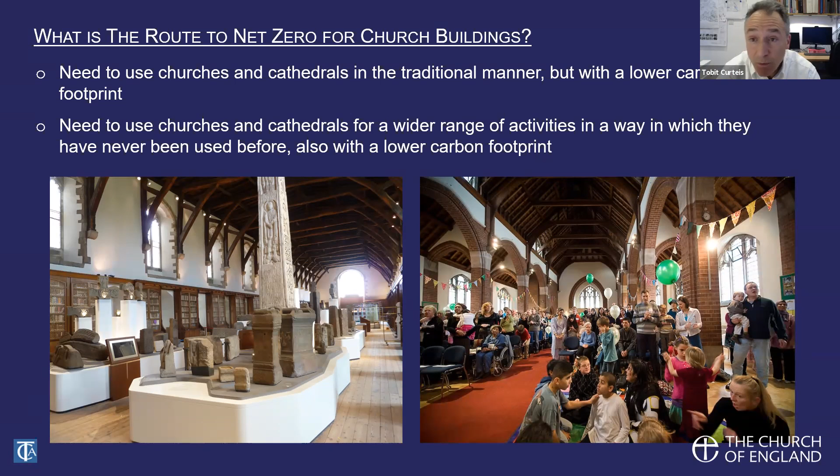Start off with this. We still need to use our churches in their traditional manner. A lot of the churches are still being used exactly as they have been for the last 20 years, but at the same time, a lot are changing their pattern of use. There is a much greater need to use churches and cathedrals for a wide range of activity and community engagement. And the important thing is, this is something that we haven't done in our churches before. We want them to perform differently, and we want them to perform with a lower carbon footprint. So it's quite a challenge.

We are looking to change the usability of the building to make it more usable, whatever that means. It means a whole lot of things, and that's one of the reasons some of these projects don't go terribly smoothly - the lack of definition of what we're actually trying to change. We're trying to make our buildings more sustainable, more comfortable, and more sustainable in conservation terms with a reduced carbon footprint.

In practical terms, I think that generally means 3 things. We want to change the environmental performance of the building. That means make the building more thermally efficient, make it more comfortable to use, make it less susceptible to the sort of deterioration that we have to deal with the whole time, because every project you undertake costs a certain amount of carbon, and so you want to try, when you do an intervention, to make sure it works for the long term.

We want to change our personal conditions. Now, when I was talking to Catherine about this earlier on, we wondered about the terminology here. A lot of the time people feel cold in a building and they say the building's cold. And the question is, is it really cold, or is it the way that you are using the building which is making you feel cold? I think this is worth addressing, and you'll see why in a little bit.

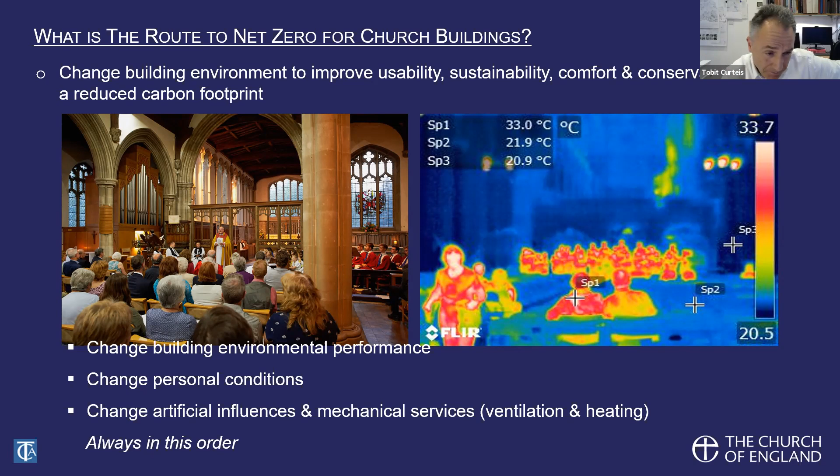Why do we care about this? Why are we worried about this? Why don't we just make our buildings more efficient?

It tends to be the unintended consequences which cause problems. Often I will see very well designed interventions work pretty effectively. They will reduce the amount of energy that's being used. They will improve the usability of the church. They will then cause condensation underneath the lead, which then starts to deteriorate at an alarming rate and needs to be replaced in 20 years. It's those unintended consequences which often, in fact, there's a long history of this in conservation, building conservation generally.

So either you end up with, in projects that don't work, either you end up with poor or inefficient results. It doesn't actually make the building feel better to use. It doesn't actually save you energy. Or you do something which then causes direct damage to the fabric, the collection, the furnishings, whatever it is. Or you're one of the projects that gets it right.

But we're looking today at projects that go wrong and things that go wrong. When we were talking about what to discuss in this, most of these sorts of talks show really good projects. They show the ones that you're proud of, the ones that went right, which is great. But it's actually very instructive to look at the ones that didn't go as well, or where things haven't performed quite as expected, and look at why and learn from them for next time.

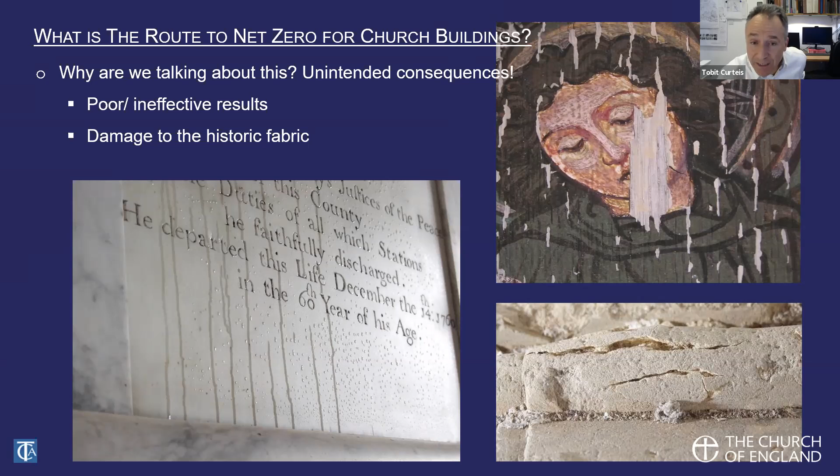So when we have a project and we want to make our church more sustainable on our path to net zero and more usable, what are we actually trying to change? What are the steps in the project that we will try and change?

The biggest, most overriding one is the building envelope. If you are in a church which is in poor condition, almost inevitably, any attempt to make the internal conditions better, more energy efficient, more sustainable, will fail or won't work very well. So even in the simplest net zero steps and sustainability steps, the first thing you need to do is get on top of the building envelope and the rainwater disposal system.

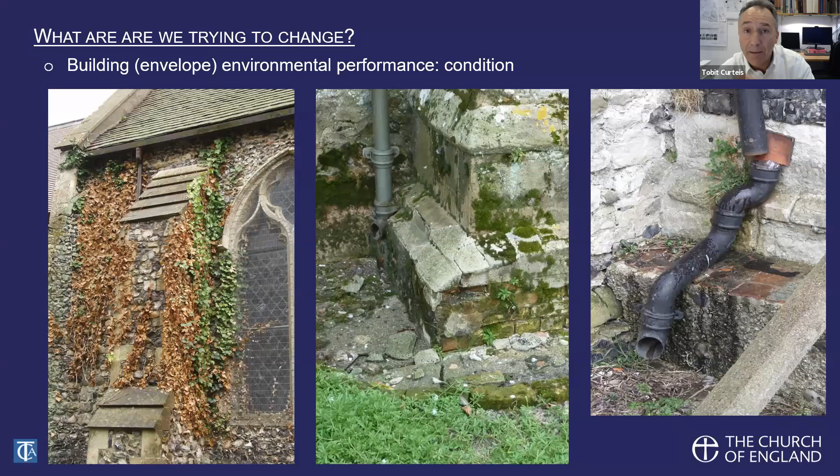Buildings like this work as a system. The envelope is there to keep water on the outside. The rainwater disposal system is there to get that water and take it away from the building. That's how all buildings function. If yours doesn't function like that because of its condition, you will constantly be struggling with what you're doing on the inside.

Next thing we tend to be trying to change is the performance of that envelope. A lot of our buildings were constructed with a particular set of requirements, one of which wasn't keeping us particularly warm. So they function very well for what they were built, but we're asking for different things.

We'll come to this in more detail later on, but it's very easy to look at a church like this with nice thick walls and, in this case, quite big windows, though you often have very small windows, very well insulated until you get to the roof, which is the weakest part in the whole system, and that undermines everything else. So we often want to change the way that building envelope works.

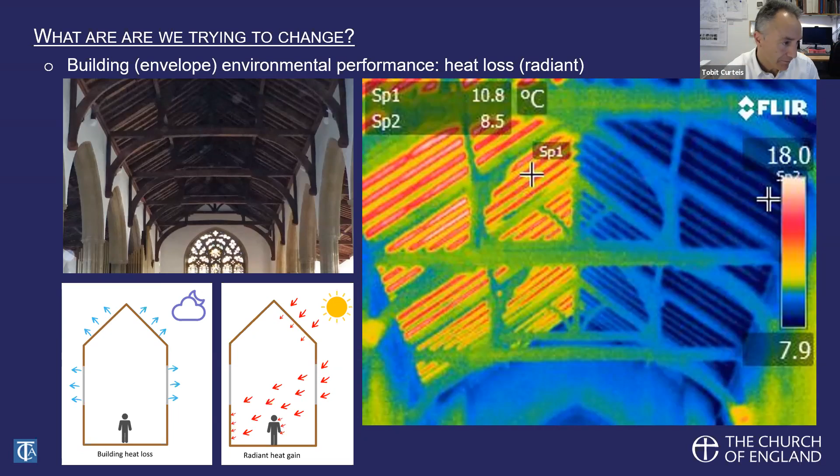It's not only the external envelope that we're concerned about. In many cases, we generate heat in one location of a building, and it disappears into another bit of the building that we don't want it to—in this case, through lath and plaster vaults into a roof space. So it's not necessarily that external part of the skin, it's the internal parts too. The more you can recognize this, the more you can read a building and see where these weaknesses are, the more likely you are to be able to target and control them with your various interventions.

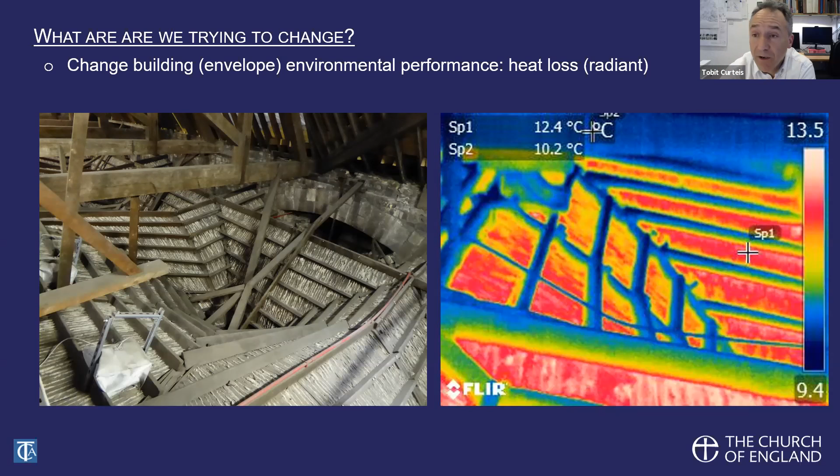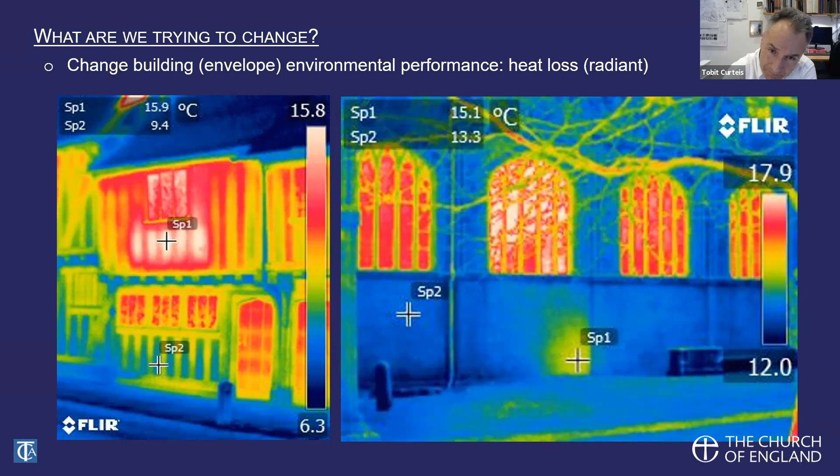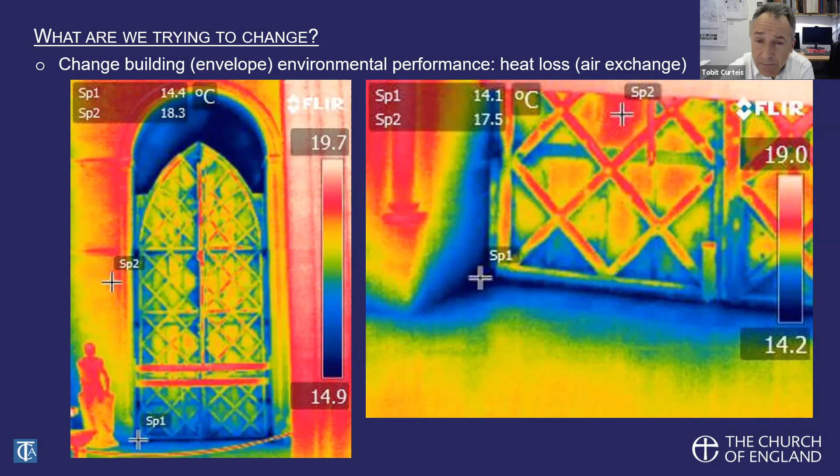And air leakage. Again, buildings weren't constructed to be particularly airtight. And what is sometimes quite useful, when you have high levels of ventilation, undermines things like thermal performance and heating. So we need to recognize where that's going on as well.

When you're looking at a historic building such as a church, it's important to understand what it does in terms of the building environment. Modern, 20th century buildings were constructed with the idea of sealing the external weather outside, then putting big machines inside to create the conditions you wanted to live in. This is not how traditional structures, and certainly not how our church structures, work. They moderate conditions, so highly unstable conditions outside are moderated by the building to produce conditions inside which are comfortable for us to use.

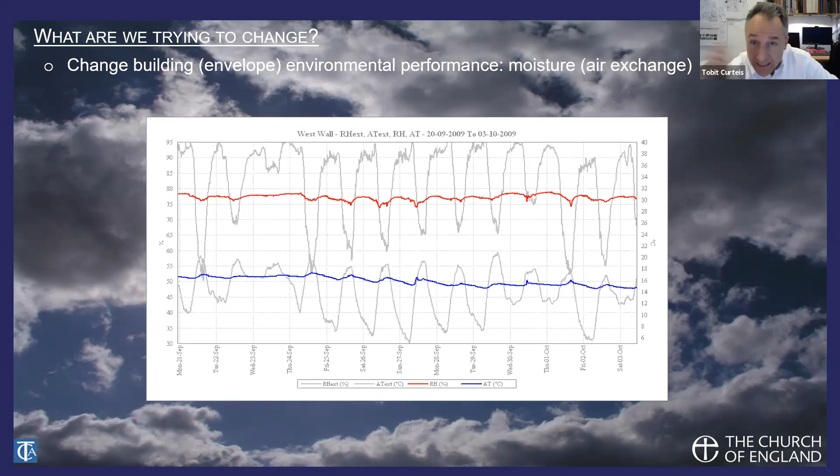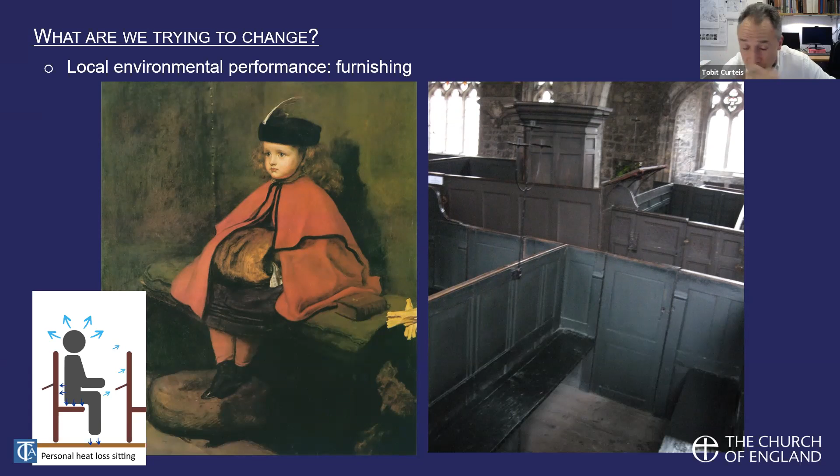That's not where he painted it, but this is a perfect example of how you kept yourself cozy and warm in a church up until the 19th century. Now, of course, we've stripped those out. In the 19th century they stripped them out, but we are constantly doing it even more these days. We're taking away a lot of the pieces of the church which made it comfortable, and we're making it an inherently harder building to be warm in. And we don't tend to recognize that.

We take out our pews to make our space more multifunctional, and suddenly we've taken away - if it's box pews - the place you can make yourself cozy in. Normal pews, we've taken away all the things you can attach radiators to immediately close to you. So those changes in how we use a building have a direct influence on how we can make it a comfortable building to use, and we tend not to be very joined up in our thinking about this.

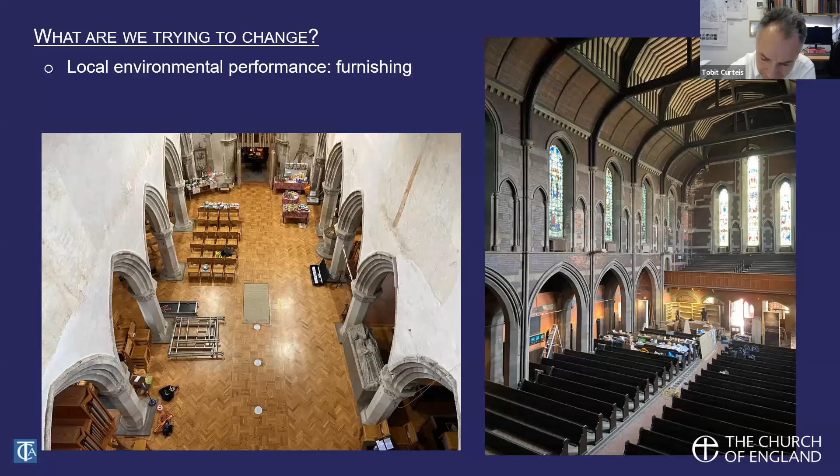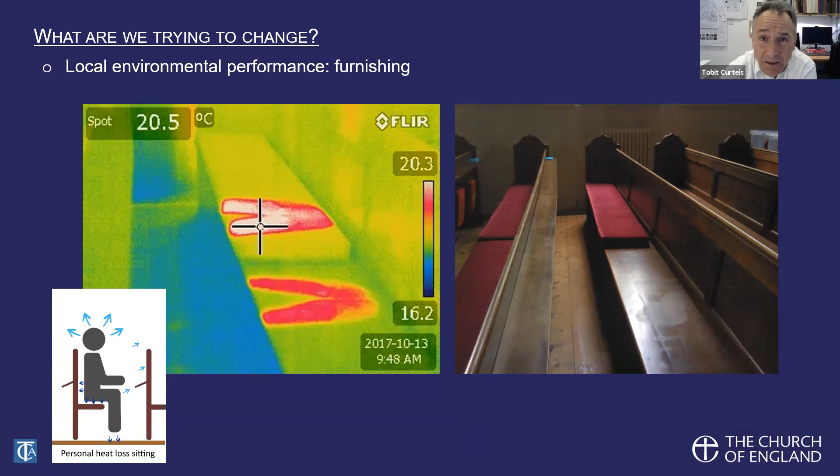We're also very good at not dressing appropriately for some of our churches. Now, I know this is a really difficult one, and architects and people working with church communities to help them use their church, make it more usable, often say, oh, we can't tell people to dress differently. And I think, well, you can't tell people to dress differently, but I think it's an important discussion to have.

Going back to the first and second sermon picture, people used these buildings very differently in the past. This comes down to how you are going to use your church in the future. If it's going to be a space constantly used for community activities, worship, concerts and all those sorts of things, you can sometimes justifiably warm it in a way that you won't suffer from the problem I'm showing you. If it's a church where that's not possible, maybe it can only be used in summer or at certain times of year when it's warm enough. So this sort of heat loss isn't necessarily a problem.

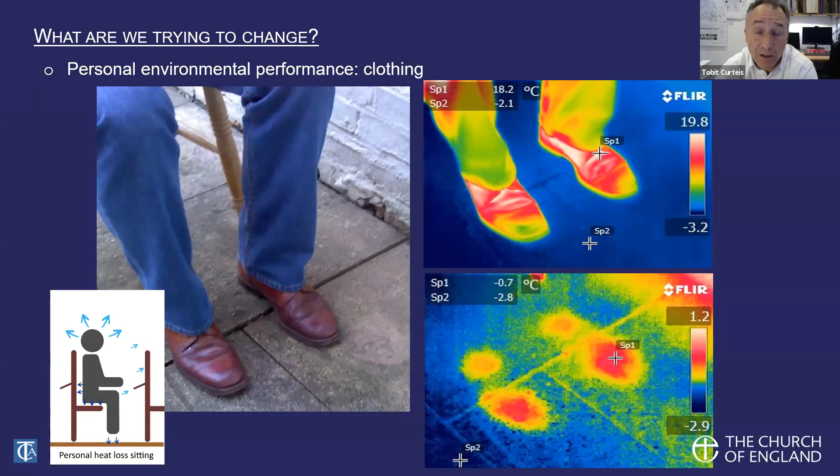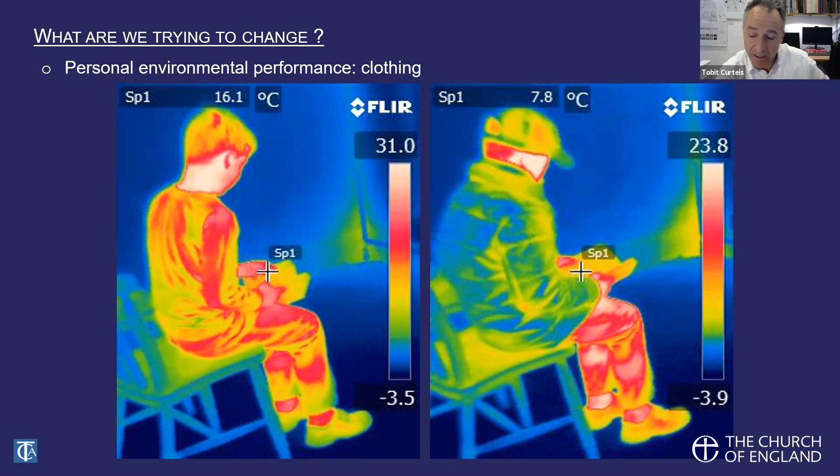And then heating and mechanical services—I have over here.

Now, we'll talk more about heating because it's one of the big things in this whole debate. Different types of heat have a very different impact on buildings and on warming people.

Broadly, it's worth thinking about in terms of convective heating and radiant heating. For most of human history, we've had radiant heating. We'd go into rooms where there were hot fires, and one side of our face would get hot while the other stayed cold, because radiant heat works through infrared radiation—it crosses and touches the surface with little effect on the air. Eventually it warms up the room, and everything else, including the air, gets warm as well.

Then from the mid-20th century onwards, we started developing warm air heating in our houses, central heating, and we got used to walking into a room where both sides of your face would be warm at the same time—wherever you moved, it would all be the same. Which is fine if you're in a small space.

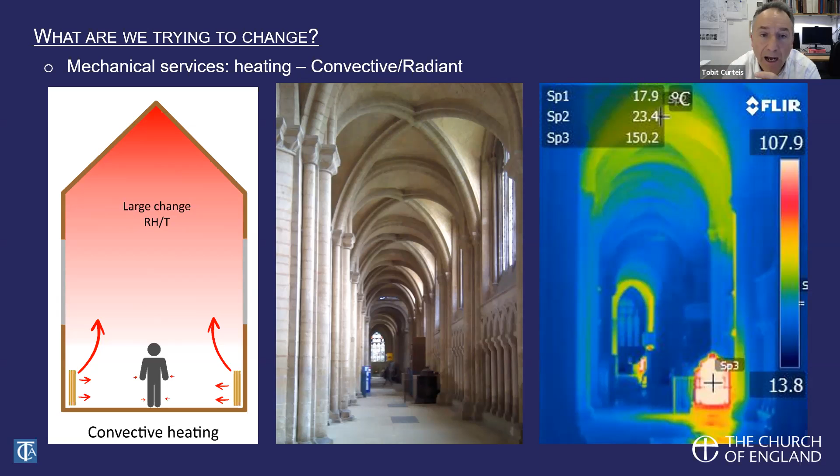A couple of other slides have shown where heat goes—that one on the right-hand side. People are in the bottom bit, in the two meters at the bottom, which is blue. All of the heat is sitting up at the top. So how and where we generate heat, and making sure it's actually warming the right thing, is terribly important.

So those are the things we're trying to change in broad terms when doing a project, which is helping us towards net zero. On the whole, people aren't suddenly going to the church saying they want a more sustainable church but don't want to make it better to use. People want to make their churches better to use and sustainable, and while doing it, reduce their carbon footprint. That tends to be the shape of the projects.

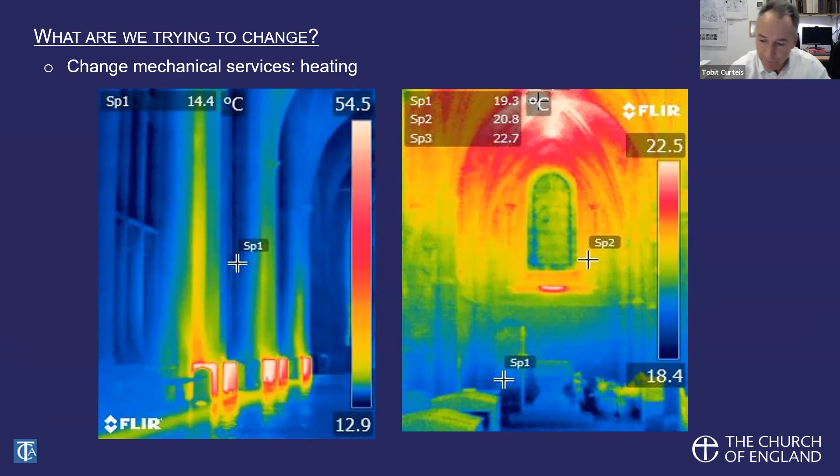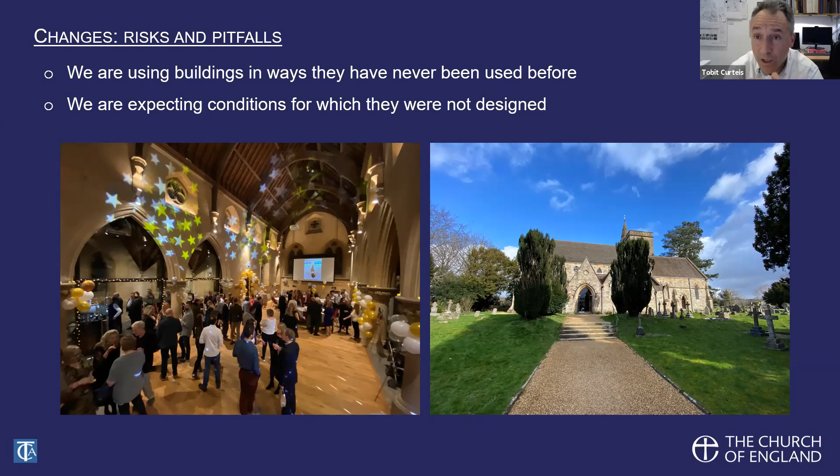So here we are, using our buildings in ways for which they were not designed, ways they've never been used before. Is it any surprise they struggle to be successful? It means we have to be very clever and imaginative about how we implement these changes, both to make them work and also not to damage the building.

The key thing, and it's a dull point, I'm afraid, which is why it's a dull slide, is that planning is very important here, and possibly that first point is the key one: actually agreeing the aims. Many projects I get involved with, people have a general aspiration about what they want to do, but often they end up saying they want it to be a multifunctional space, which is often just a way of not deciding which of those 12 functions you actually want the space for.

It's very difficult to make a medieval church work for everything. You need to actually define more precisely what you're doing. Now, allow flexibility, of course, but try and define it.

Agree with the PCC what you're going to do. You obviously need everyone on board for this. Consider the long-term usability of the church as well as the immediate future - changing church populations, changing needs and uses - all of those things for the next 25 years rather than for the next 2 years.

And early on in the process, start that discussion with your professional advisors. This can be very informal in the first instance - say, we are trying to do this. We want to have concerts, we want to have messy church, we want to have services. These are the sort of 6 or 7 key things we want to do.

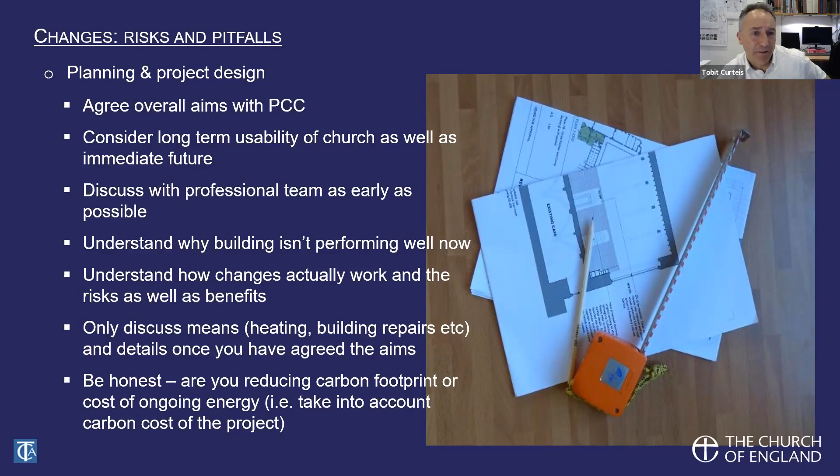In terms of the changes you're going to be implementing, back to the boring old building envelope, it absolutely must be in good condition. Otherwise, everything else will fail further down the line. And by good condition, I don't only mean repaired. There needs to be a program of maintenance. There is no simpler form of sustainability than making sure that the building envelope can be sustained in good condition.

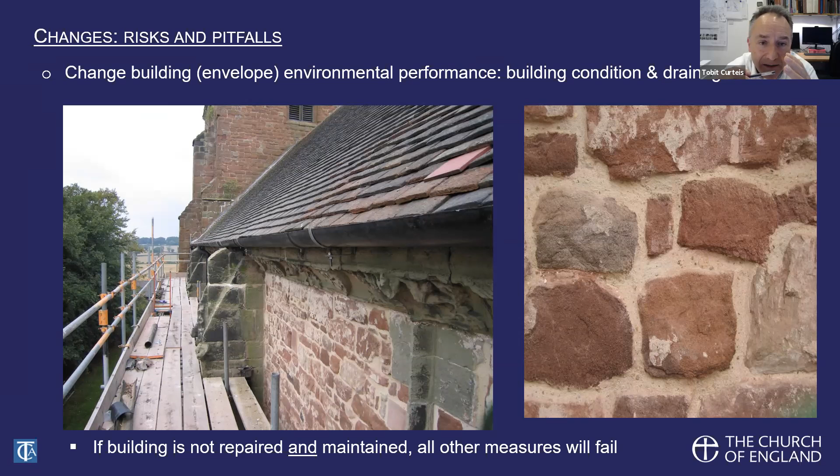Now, this is really difficult, as we all know, because it is not easy, but it is comparatively easy to get capital for a major repair project. It is far harder to get ongoing maintenance funding for clearing the drains and gutters, and yet that's often what causes the problem a long way down the line. But the stability and condition of the building envelope is utterly key, and same with the rainwater disposal system. Most of the projects which have major problems with moisture and the like do because of these two elements.

Drainage, water transfer, it's less straightforward than you might think, but again, a good church architect and engineer will be able to help you design that, but it needs to be top of the list. And unfortunately, drainage is probably the most boring element of the project. It's not the one that you're going to put on the front of your fundraising brochure, but it's probably the one that, if you get it wrong, will undermine everything else. So learn to love drainage, move that to the top of the priority list. Everything else after that will work much better.

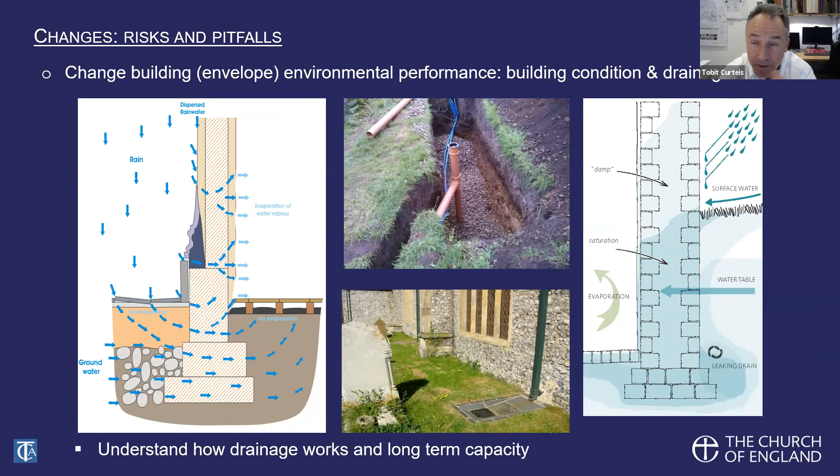Then once we've got our building working as it should, the question is, do we want to change it? Is it good enough? For many churches, it is. It's always going to be a little cold and a little drafty, but if there isn't water coming in, that's fine. That's as good as you're going to get. From a conservation point of view, it's fine. From a usability point of view, maybe you're not going to be having children's groups and concerts three times a week. Maybe actually it's going to be something far more simple, and that's sufficient. Or maybe you want to change the building. Maybe you want to make it better, warmer, more usable.

Air leakage, referred to before, is a significant one. Maybe you want to, and I'm not suggesting this for any churches, but interventions which make a difference. On the right-hand side, we've got a church, in fact the church with that data I showed you earlier, Hardham in West Sussex, where they reinstalled the ceiling. The 18th century lath and plaster ceiling had been taken out, revealing the timbers, which were perfectly nice timbers, not particularly historic. But as a result, there was an enormous amount of air leakage through that roof, which made the internal environment very unstable, made producing stable heat very difficult.

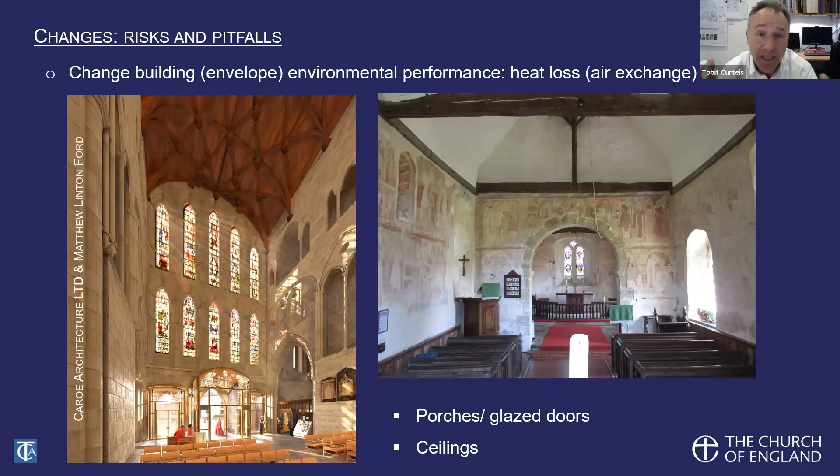The ceiling was reinstalled, traditional lath and plaster. In fact, they did insulate behind it, and it improved the thermal performance of the church immensely, and the stability. In this particular case, it also has hugely important very early wall paintings, which is what drove the project. But reinstalling ceilings, which wouldn't have even been considered 25 years ago, is now something which we are looking at again. The use of secondary doors, of glazed lobbies and porches makes a considerable difference. It's not something you will do in all cases because it's a major intervention. But if air leakage via the main doors is the key thing, then that's a tool that you can use to change the performance of the building.

Insulation, thermal insulation, I should say. Everyone seems to love thermal insulation. It is just a way of changing the thermal performance of the outer element or one of the inner elements of the building envelope. It can be very beneficial, but is it necessary? I had a case recently when I was asked to advise on insulation in a roof of a church, which would have been quite complicated. And the conversation moved on to how often you use the church and how often it's heated. And it was used very irregularly, and it had the heating turned on for an hour before and off after the service. And the question was, what's the insulation going to do?

The whole point of the insulation would be, if you warm the building up, to make sure the heat doesn't get out, so you don't have to put more heat in to keep people warm in the building for a long time. But if you're only actually using it an hour every couple of weeks, then there's no one to keep the heat in there afterwards for. So why do you need the building to be more thermally efficient?

Insulation has a carbon footprint. You've got to make it, you've got to ship it in, you've got to put up scaffolding, you've got to drive it there in diesel trucks. So you end up with a carbon deficit once you put it in, and you hopefully will pay it back fairly swiftly if you're putting it in the right place and using it efficiently. But it isn't a neutral intervention. And so it's very important to actually work out what you will gain from putting this stuff in.

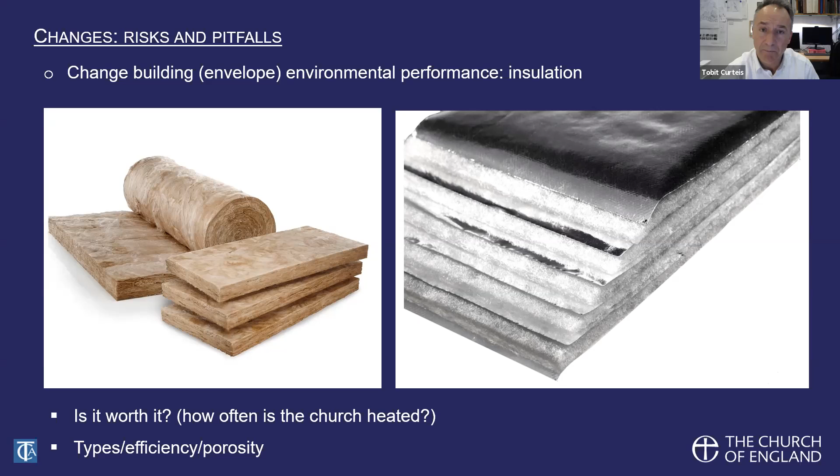So one has to be, again, terribly honest about what we are trying to achieve. If the important thing is reducing heat loss, and the only way to do it is using a less sustainable material, there you are. That's your cost-benefit analysis to sit down and work out. If you have the space to use a sustainably sourced material, even better. But you can see where that discussion needs to go, and it doesn't happen as often as it should.

All well and good, but up until the insulation going in, the roof space was reasonably warm. And so when condensation happened on the slates, it evaporated fairly quickly. And it didn't happen that often because the roof was fairly warm. Now the roof is all insulated. And so the heat isn't getting into the roof space and isn't warming it. And so the roof space is colder, and so the slates are colder. So the condensation on the slates is more regular and it isn't evaporating as fast.

Are we worried about that? I don't know, it's being monitored at the moment, but we should be questioning it. We should be saying, we are making this change for beneficial reasons. What are the unintended consequences? And are we happy with them? Now, in this particular case, I think it is not a particular risk, but you can see the point here that we tend to focus on the good things and we ignore the potential bad things.

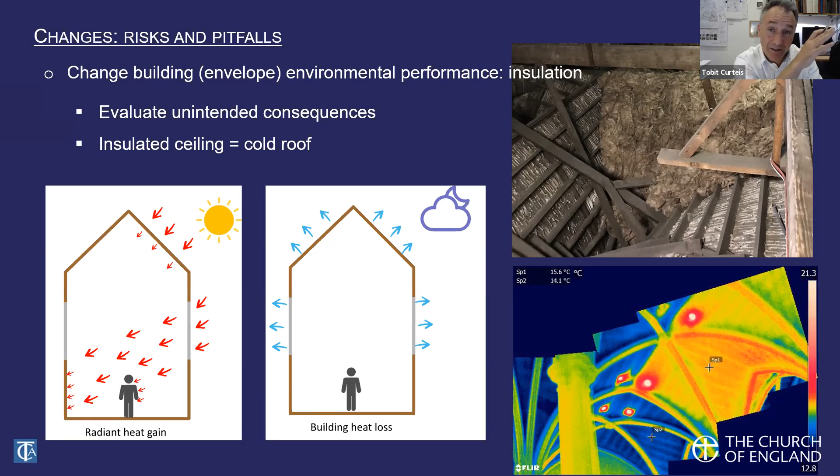Many of you will be familiar with underside lead corrosion, which is probably the most catastrophic example of this in recent years. If there's another one, please do tell me, but this is a good example. Code 8 lead on a church roof should last for 100, 120 years, something like that. In the 70s and 80s, we started putting in much more warm air heating into churches. Roof structures and roof designs were changed, and you ended up with a situation where you were getting insulation underneath lead. In this case, it's just fiberboard insulation.

Condensation was happening in these warm roofs that was sitting there underneath the lead, and rather than forming the lead carbonate, that dark grey, which protects the lead, it formed something called hydrocerussite, which is this white powdery deterioration, which is self-sustaining. So once it starts to form, it just keeps on forming. It then acts as a sort of poultice, as a blotting paper underneath the lead, and lead, which should last a century, was failing in 25 years, purely because of the design of heating and insulation that we had chosen to put in. And many churches and cathedrals are still living with that.

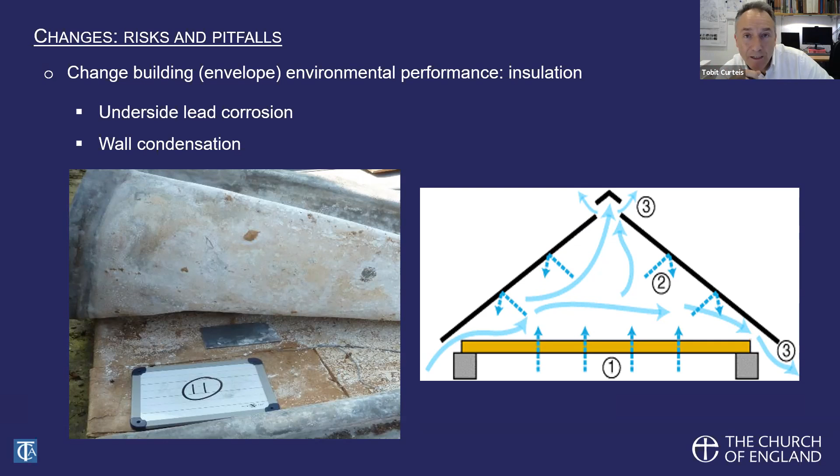Now that's now recognized, so new roofs and refurbished, repaired roofs are being designed differently. But it's a very good reminder of how our clever interventions can go terribly badly wrong. And hopefully it'll make us think much more carefully about those unintended consequences.

I'm regularly asked about secondary glazing in historic buildings, in windows, to see whether it is worth doing protective glazing on stained glass windows in order to improve the performance of the building. There isn't time to go into how it all works, but the short answer is that ventilated protective glazing does reduce the U value of that particular section of glass reasonably.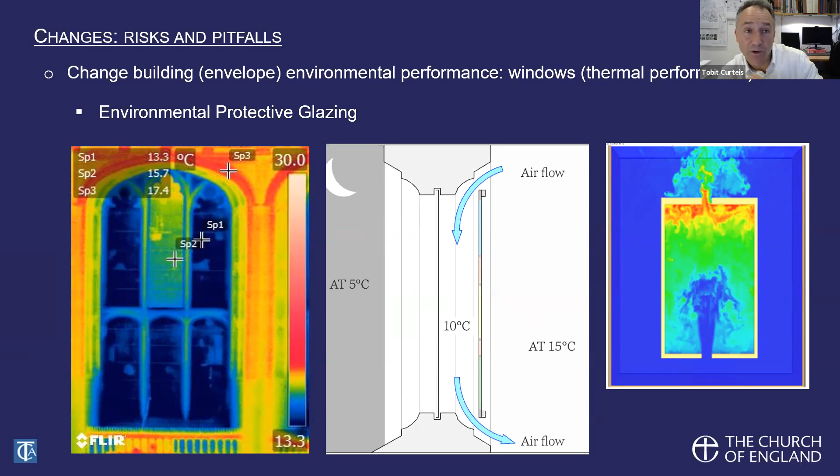But actually, when you look at the surface area of glazing and the surface area of the interior of the church, and the cost of doing good conservation grade environmental protective glazing, you'll find that the benefits are very, very small indeed. So it's not generally recommended for that.

Ventilation, air exchange. This is a particular bugbear of mine, as some of you might know. We're often told about this stuff called fresh air on the outside of the building and how good it is to come on the inside. We've seen how unstable the air is outside, and a lot of times it's also fairly polluted as well. So there's a real debate about whether you actually want to let too much of that air in.

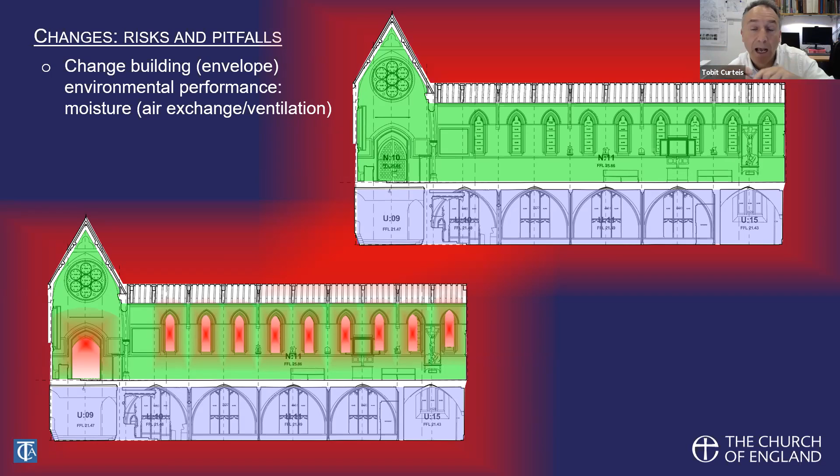All of our buildings are pretty leaky anyway, so there's quite a lot of ventilation going on, and that's not a problem. But by introducing that slightly scary looking red air on the outside into the building, what you will do is increase the instability in the building. Is that a good thing? Is that a bad thing? I don't know. It's case by case, but it's very important that one recognizes it before you start ventilating or building in ventilation as part of your project, that you know what it's likely to do.

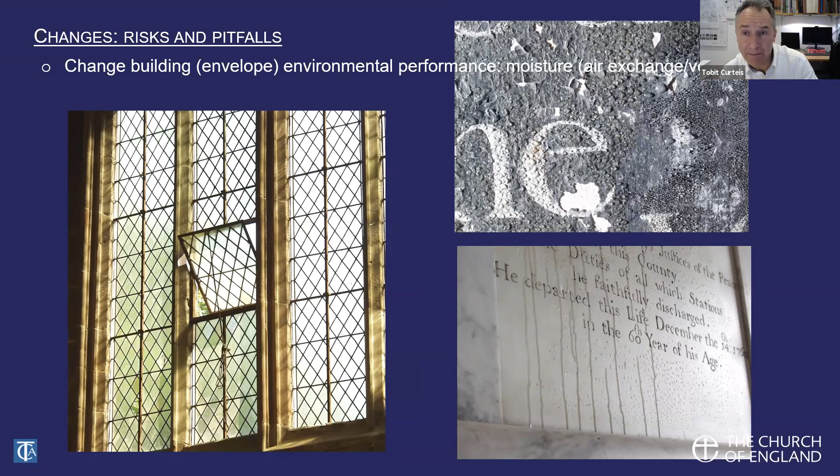Now, I will show you and talk about some good examples in a moment, but this is what goes wrong. Uncontrolled ventilation of, in this case, warm wet air comes into a cold spring building. You get condensation on your paintings, on your monuments, you get corrosion, you get all sorts of things going on. So simply introducing uncontrolled ventilation with the exterior can be very damaging. It can also be very useful.

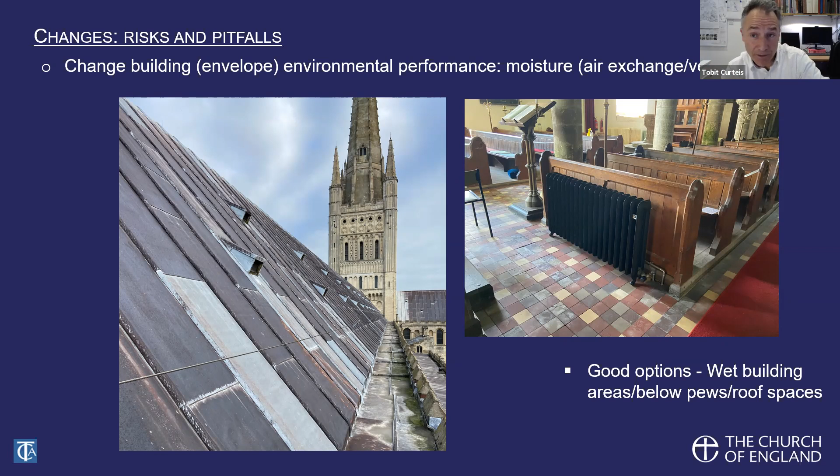I can't think of many examples with ventilation in roofs where you overventilate. So that's a relatively safe space to do it. Underneath pews as well, where you're against moist earth, ventilation from the outside there can be extremely beneficial. But the point I'm trying to make is that this is a very powerful tool. Because it's free, because you're not paying for it, it tends to be poorly thought through. So just think through, if you are introducing different airflows into your building, how it will affect it. And there are all sorts of clever ventilation methodologies you can use as well.

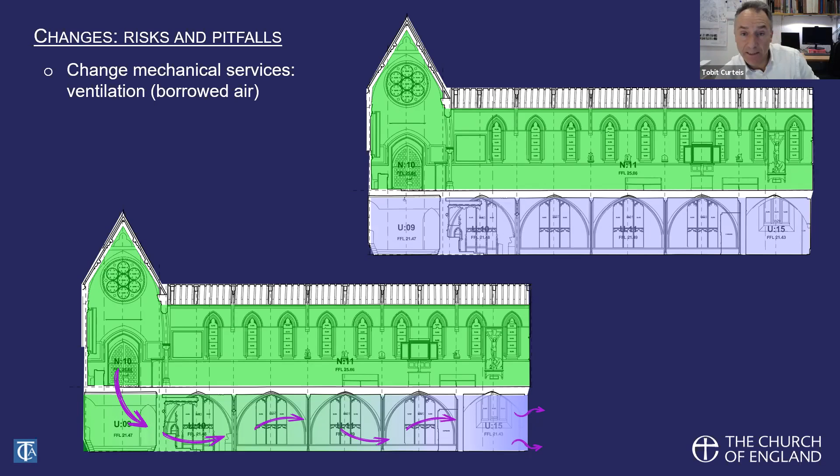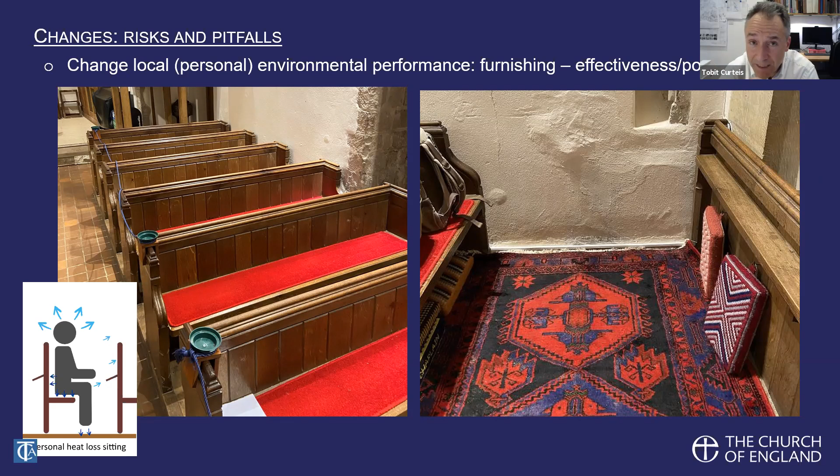Local heating, local heat loss. There's all sorts of views on church furnishings. But basically the question is, if you want to insulate yourself from the cold floor and the cold bench, you can do it through furnishings. It is appropriate in some spaces, it's not in others, but recognize it as a tool which is useful to use. And yet again, the point about dressing, depending on the church.

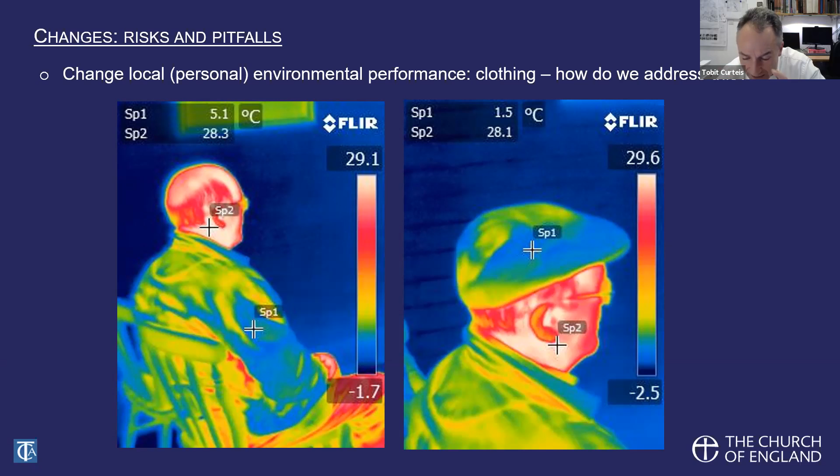If you are in one of those churches that is going to be used a few times a year and not in the winter, dressing appropriately is not an unreasonable thing to ask, and even to let people know about. People are so unused to some of these buildings now that people don't dress appropriately and then feel uncomfortable, and that dilutes the experience of being in some of these rather wonderful buildings.

With heating and projects involving changing or warming, I tend to think of planning rather than just heating. Planning is all, as I've said before, and it's extremely useful to use what we tend to refer to as the 4 Ws.

Who are you heating? What sort of people are they—children running around, or people sitting and listening to a concert? What are they doing? Where in the church? Some of our churches are tiny, some are enormous, and you don't need to heat throughout. And when? How long are these activities taking place, and what time of day?

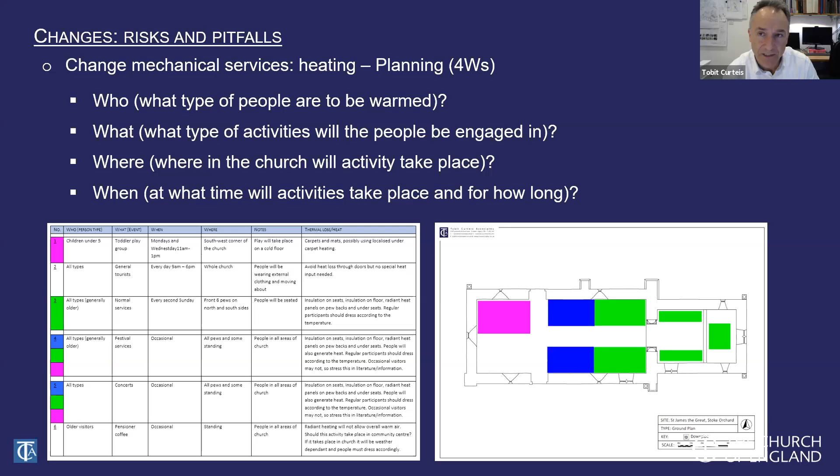It's very useful to map this out, even with a plan, to mark out your zones and say, right, these are our heating patterns. This is something you can give to a heating engineer to say, this is what we're trying to do, and they'll probably say we can't separate it out this much, but we can separate out that section and this section. Planning this through with a drawing and a list of activities puts you in a much stronger position. We'll look a bit more at heating in the final bit, because it's something that comes up again and again.

We've discussed the issue with convection and warm air, yet more examples of air heating up church vaults. If you can picture what your heating does and where the heat goes, you are in a much stronger position to actually design it well.

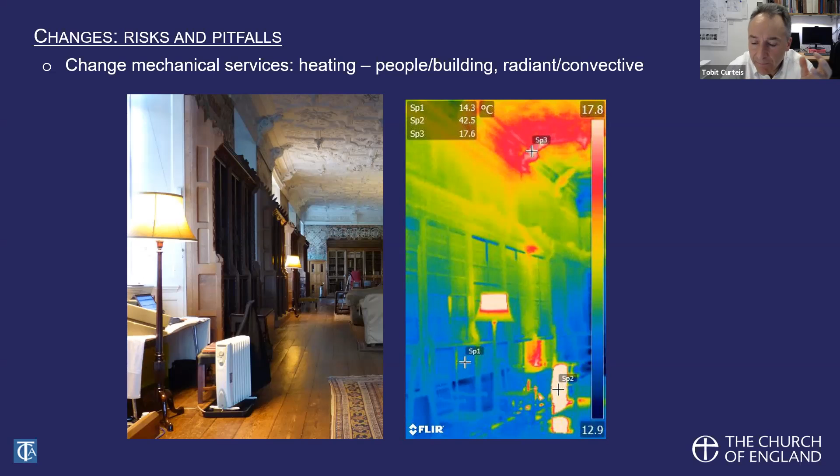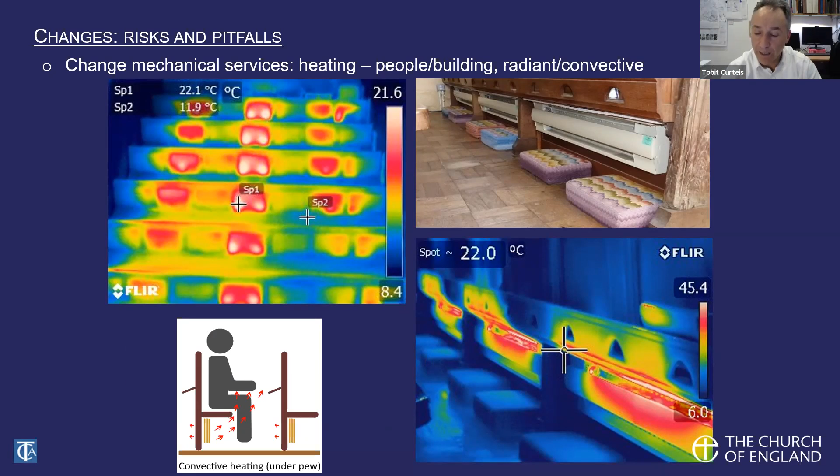Convective heating, as I said before, involves buoyancy, but that's not necessarily a bad thing. You'll all be familiar with pew heaters like this. If you're generating your convective warmed air in the right location, it can do the job of rolling over people and keeping them warm before it disperses. If you have it positioned wrong, and the people are down at the bottom, it doesn't do any good at all. So convective heating is not necessarily a problem—it's just about how it's set up and how you've understood it to be used.

Radiant heating, on the other hand, has got a very bad rap over the years, because it used to be those horrible red radiators on the walls which toasted your head and gave you asymmetric warming, which is very uncomfortable. But of course there are many types of radiant heating. Underfloor heating is one we're now all becoming very familiar with, and pew panels and wall panels are so much more efficient than they used to be. So the option of heating the local space rather than the air is much more efficient than was previously the case.

Again, it comes down to that coloured plan: what am I going to be doing? If I'm going to be using the whole space seven days a week, maybe you do want to fill it full of warm air, and maybe that's an acceptable use of energy. But if you're going to use it only periodically, maybe you just want to localize your heat into a few pews—maybe only 20 people, or a dozen, come and use those pews. That's where you want to use your small financial budget and carbon footprint efficiently.

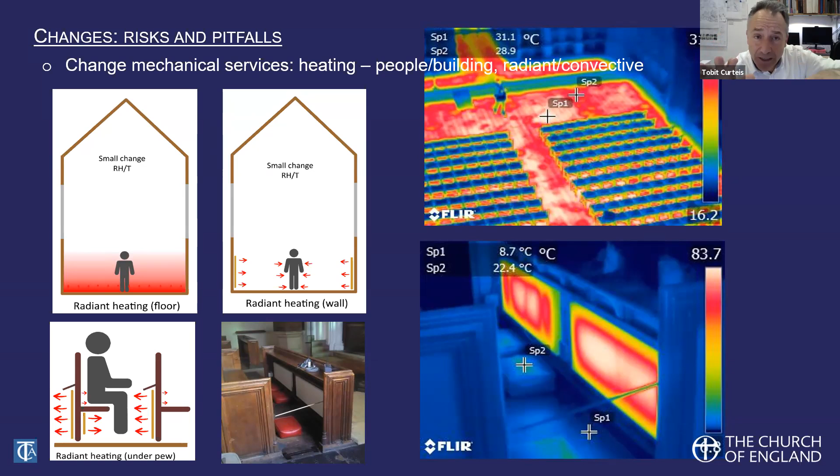In some cases, the archaeology has already been disturbed in the 19th century, so it's very easy to make your 500 mil hole. In some cases, it's not.

One of the impacts of underfloor heating, which tends to cause problems, is how it affects the hydrology, the water in the ground. In a lot of churches, the whole floor is porous and the walls are porous as well, so when that water evaporates out, the load is spread across the floor, the walls, all over the place. If you put something which seals the floor in, all of the water is driven towards the edge, and then through capillary rise, it rises up your walls and evaporates there, causing damage on the most sensitive bit. It might be carved masonry, you might be lucky, it might just be plaster, but it's often lovely masonry or monuments or other things.

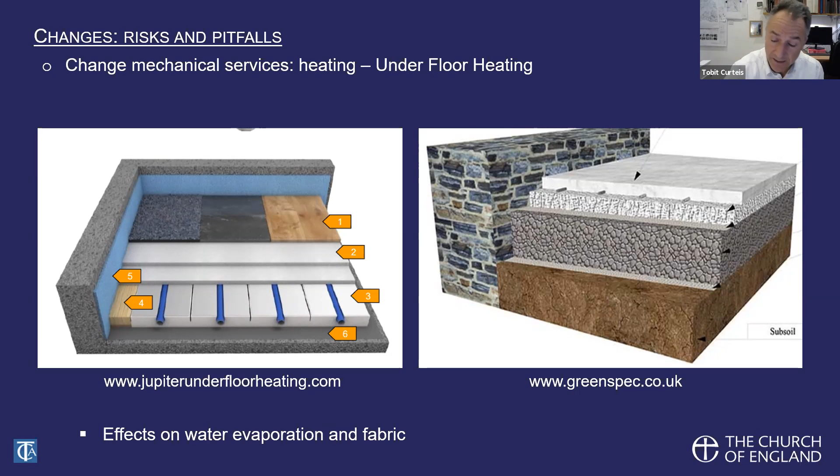So by putting in underfloor heating and not thinking through how water is driven up the walls, you can cause immense damage. That's why there are discussions about the different types of underfloor heating you can successfully and safely put in, and we can discuss that in the Q&A afterwards if you like. It's a tremendously big intervention, but if it works and it's an appropriate building, it frees you up to do all sorts of things in that open space.

Another problem which constantly comes up with heating, new and old, is the location of emitters. If you're not using underfloor heating, you need to put heaters somewhere, and it's very difficult to find safe places to put them in churches. Here's a late 19th century example—definitely not a safe place. You can see exactly what's happened with accelerated evaporation on the column, driving water up and evaporating out.

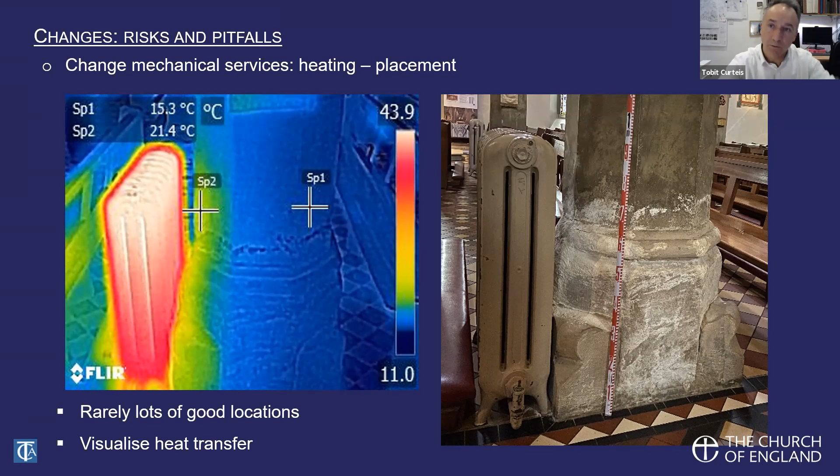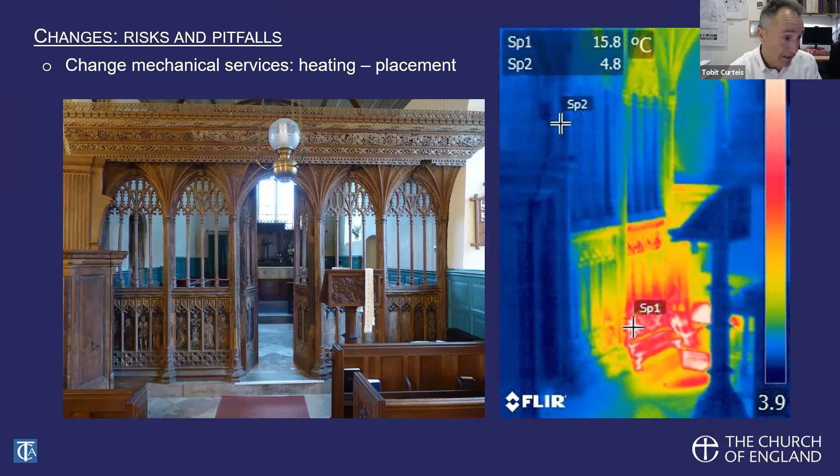Causing salt damage. A rather more recent example of a wonderful screen in a church, and you can see the effect of the heater immediately behind the screen—really rather terrifying. This is the sort of thing that happens as a result.

Timber continues to flex and remains supple and responsive to moisture variations throughout its history. I've worked on timber which is thousands of years old and it still works. Paints become much more brittle over time as they chemically change, and if you combine brittle paints with responsive timber, you end up with this sort of failure.

So that's really just to say, again, think through the unintended consequences of where you're generating heat, rather than concentrating on the fact that on the other side of the screen the people in the pews were going to get very nice, cozy and warm.

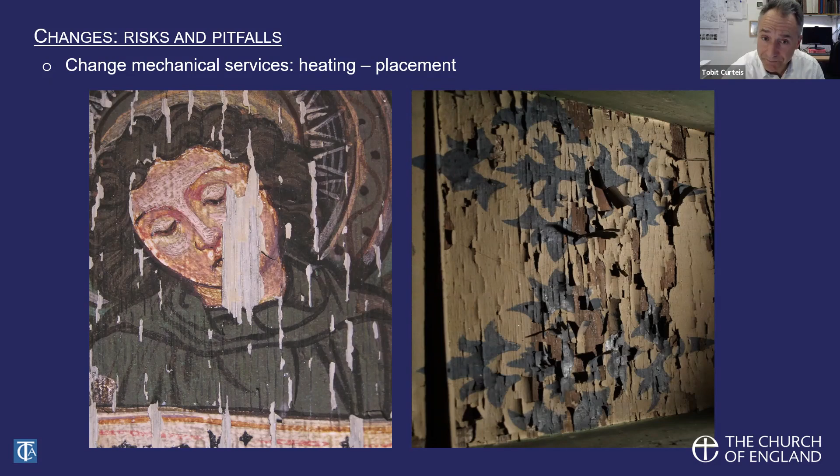So, some key points. We're using buildings in ways that they haven't been used before. We are demanding an awful lot more of them, and therefore we need to think through very carefully what our changes are likely to do, both in terms of the positive side for us, but especially in terms of the negative side for the buildings.

The thing about planning, I cannot overemphasize. The best possible projects I work on are the ones where people have spent the most time arguing it all through, first defining their aims and then how they're going to get there, before it really starts to kick off and shape up into a project. The worst ones are when there's a vague aspiration for a multifunctional space which has never really been defined and never thoroughly discussed by the PCC or whatever the client group is.

Get the right independent advice. There's a lot of poor advice out there, and a lot of advice which is linked to sales and supply. It is difficult, but the CBC are very good at advising you how to find that information, and the DAC often also. Try and get good independent advice early on, rather than going to the heating supplier and asking how do we do something.

Building condition and maintenance—I know this is something anyone who looks after a church will roll their eyes at. It is so difficult to achieve, but the maintenance side is as important as the capital works on the building, and without it, that investment will fail, and everything else down the line will just work worse. If you're looking at heat and warmth, address heat loss before you address heat input.

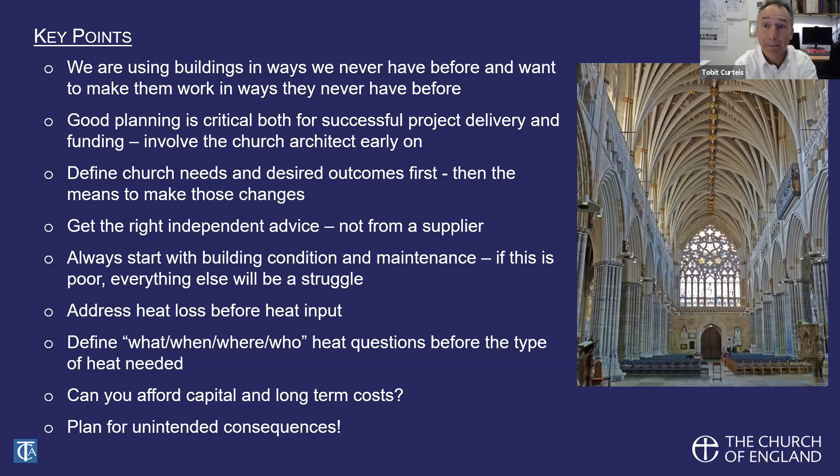That way you will recognize the things that will go wrong and you can design around them. Most of them can be recognized - it's very unusual to come up with a new problem. But it's very usual for people to ignore known problems because they're so focused on delivering the positive, happy side of the project. So those are the key points.

Some resources - you will find much that Catherine and others have been working on the Church Care website. You probably know all these links already.

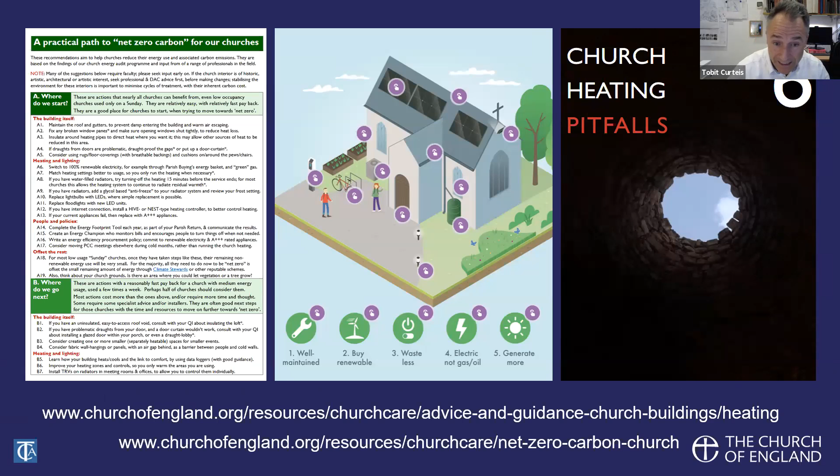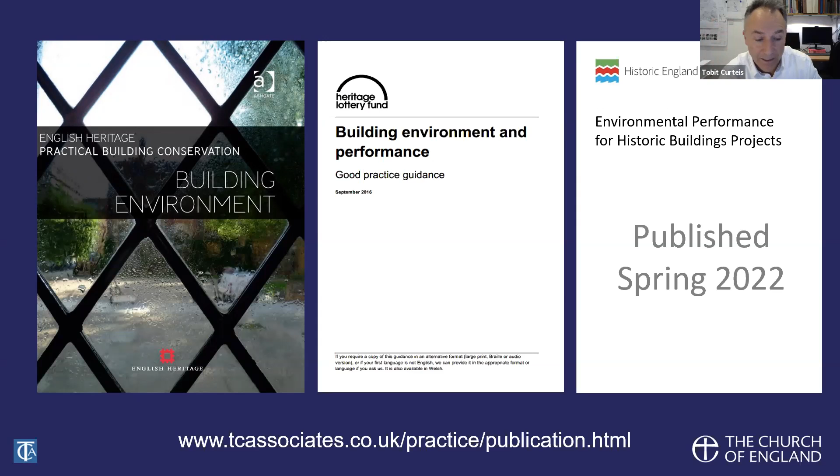Good, I think that's probably all we've got time for, before hopefully some questions. Catherine.

Brilliant, thank you so much, Tobit. You really do know a lot about a lot of projects, don't you? Could you stop sharing your screen so that they can see us both?

Now, we do indeed have - I have to say first, the emphasis on maintenance, I can't agree with enough. Just the importance of the basics is so important. It's so difficult, isn't it?

But it's so important. So the top question at the moment - this has come up several times, it's such a difficult question - ventilation for conservation best practice, reconciling that with ventilation advice for COVID at this current period that we're in now. Any wisdom on that?

Yes. It's difficult. I mean, the two things are directly in conflict. I think the good thing one can say is that when we're talking about deterioration, in most cases, it's over a very long period of time.

So the fact that we are breaking the rules now for a couple of years, it's not ideal, but it is only for a short period of time.